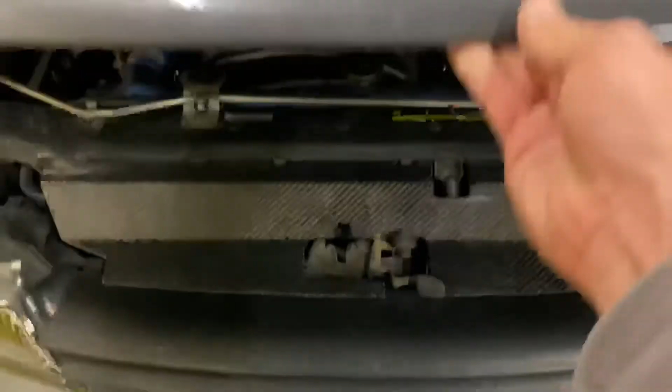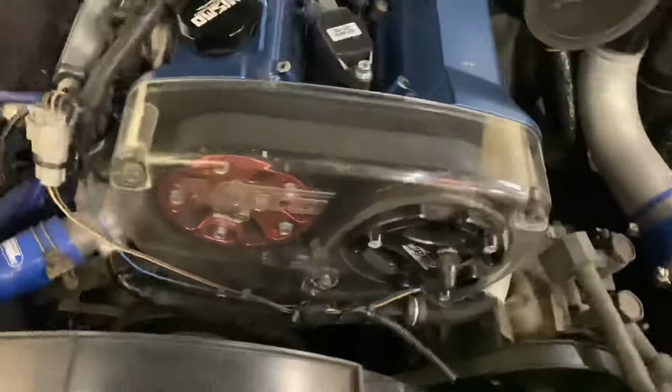So the only damage that I had happen was I got a PRP trigger kit right here, and the plastic covering that goes over the wiring got ripped off by the belt that came off one time, and frayed a little bit of this water hose right here. Not real bad, just the outside edge of it got a little uglied up.

Anyway, that Ross tensioner should correct this problem. It may be kind of hard to see with the belt on right now, but the alignment from the balancer—I can't even see it down there. Once I get this belt off, I'll turn on the light, see if we can see that alignment a little bit better, and you can see how it's a little bit off.

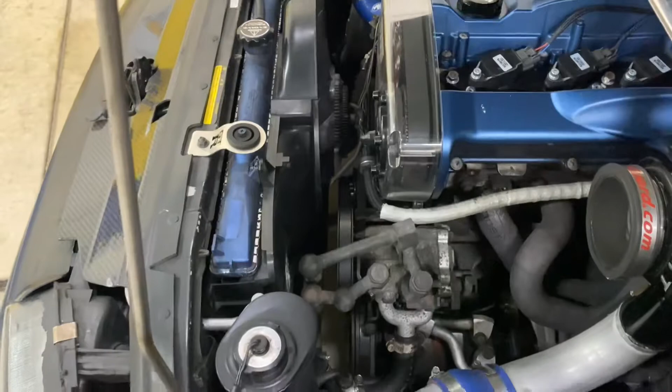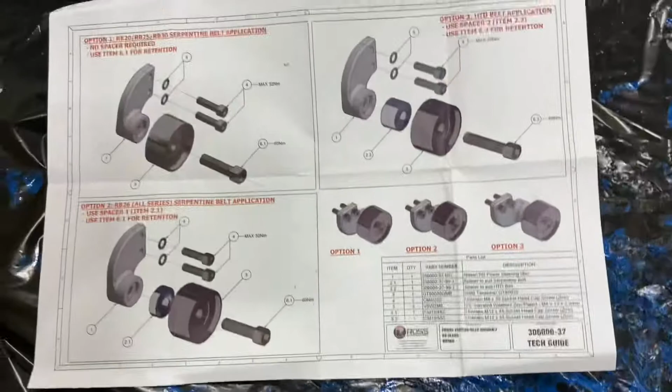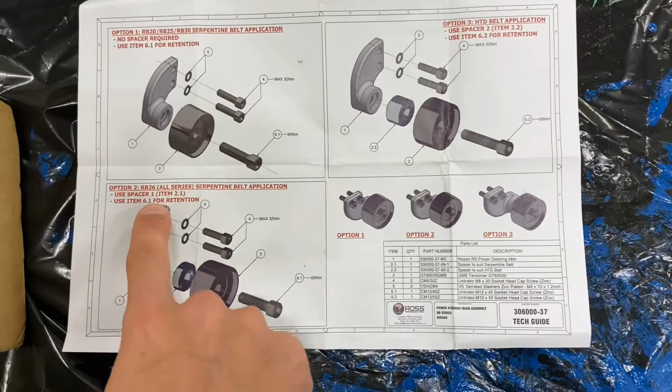I'm going to press on putting this kit on, which I have right here. Let's take a quick look at it so you guys know what's involved with this thing if you decide you want to try it out. So this is the instructions that come with it. You got a couple of different engines here. Basically all it does is it has a different size spacer or none, depending on what you have. RB26 is here, so I'm gonna start with this one and see if the alignment's good.

Gives you a rundown of what all comes in the box. This is Ross Performance—some of you guys are familiar with them, those that aren't, there's their contact information. And the kit itself, power steering idler. High quality looking stuff, I'm not gonna lie.

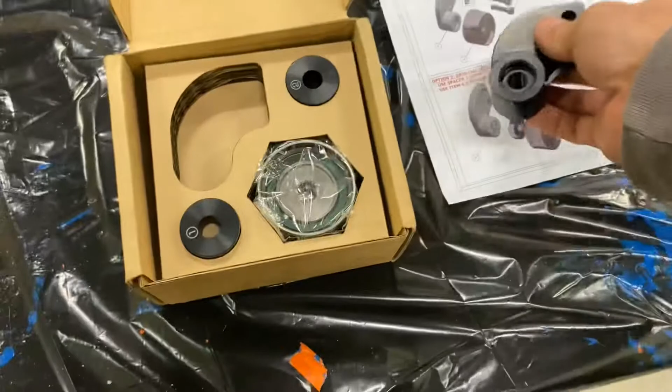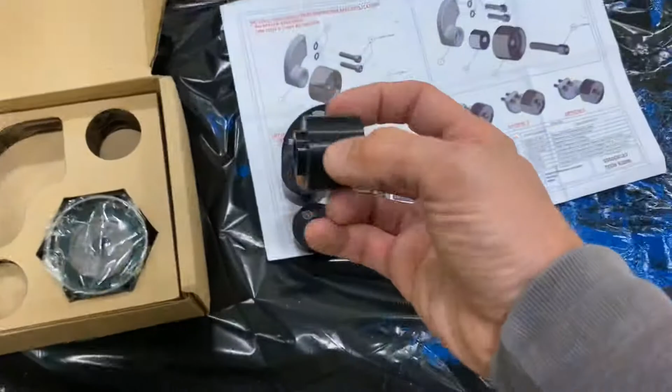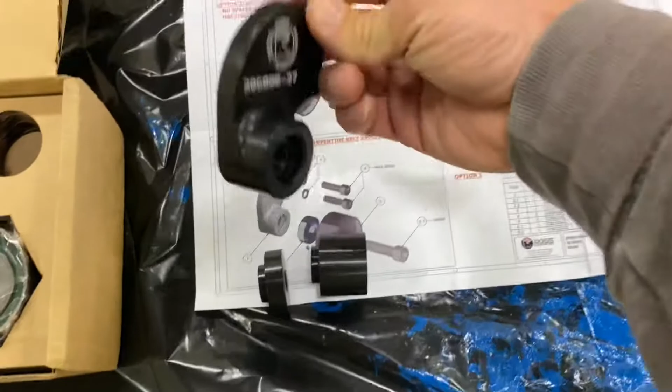So the main bracket itself here, good piece of billet aluminum. And you got your different spacers here, and what we're gonna be using is that number 1. You also have this number 2 for a lot larger, or to bring it out farther from the engine, or you can run without it. So you can just install this like that, but the one I'm using will space it out a little bit.

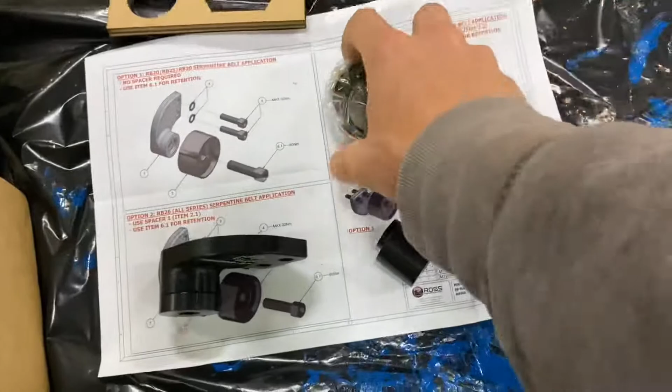And then it comes with the pulley itself, a little bit of hardware. Looks like you're gonna need some Allen wrenches to get those tightened up. So get you a set of Allen wrenches, get you a little tool set, and you should be able to get this thing together pretty easily.

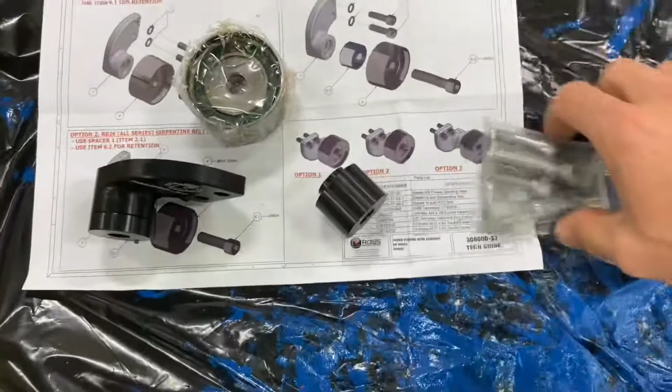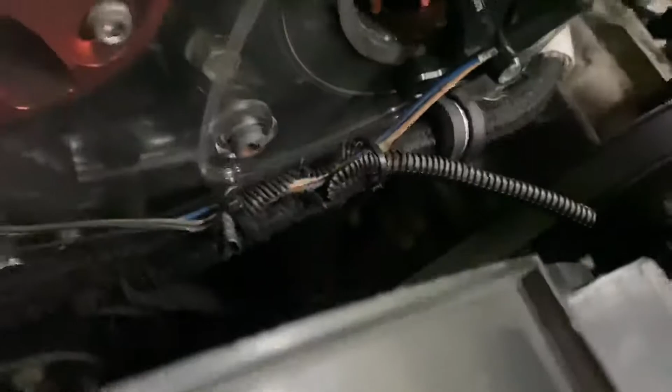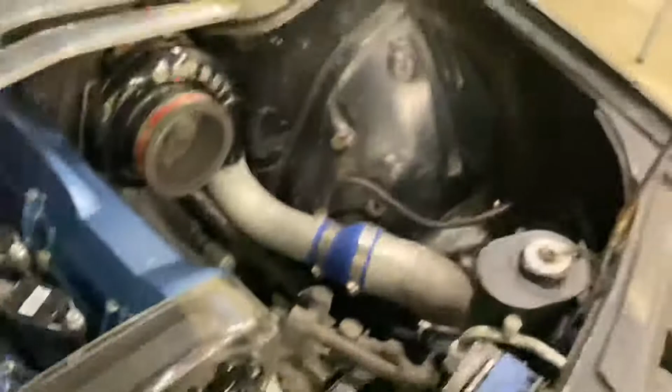All right, so again, it's gonna be hard to see because I don't have my light on my phone here, but I'll try to bring up the light for you. So down here behind the power steering pump, you can see these 2 bolts right there. I'm trying to brighten it up for you, but it's not really working that good, but that's where your bracket right there attaches to. So I'm gonna go ahead and get this belt off and see if we can get to those 2 bolts.

All right, so if you've never taken the belt off of your R32 GTR before, the way it's gonna work is, looking at the power steering pump, you got a bolt right here, which is the top mount bolt for the pump.

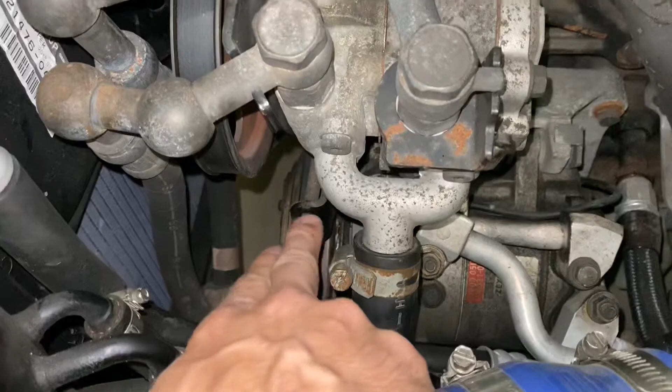Loosen this bolt, you can access it through these holes on the pulley, but you may have to bump your engine over to get it to line up like I have here. Then over here on this side, this is the adjustment. You loosen this up once you've got that other bolt loosened, and this will allow the pump to swing forwards and backwards. But before you loosen that one, let's see if I can get you down there to it, right below the power steering pump.

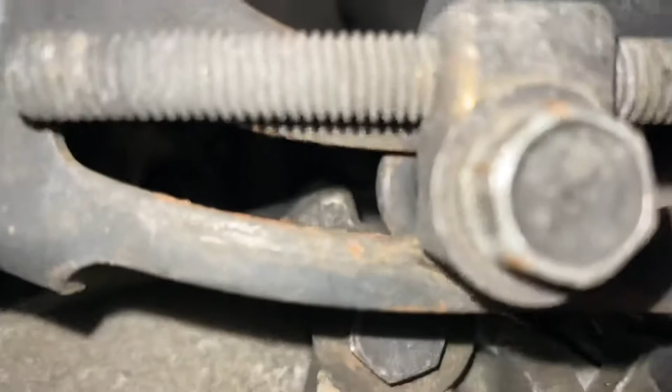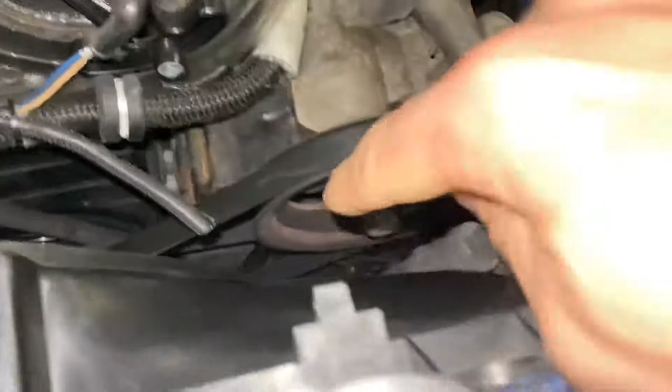Hopefully you can actually see that. There's another little bolt right there, you can see the bolt pass through that you're going to be turning from the other side to loosen it. There's a bolt right there that locks it in place directly below the pulley. Sorry for the crap quality, but it's kind of right underneath the pulley back here. Again, there's those two bolts we're going to mount our new idler to. So loosen that, loosen this one down here underneath, turn your tensioner right here, and then this whole pump will push down and you can get the belt off.

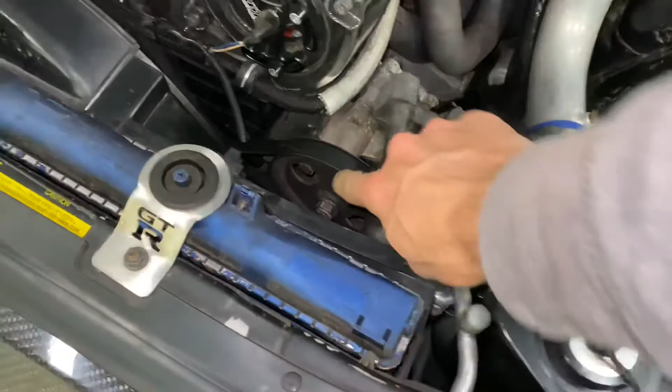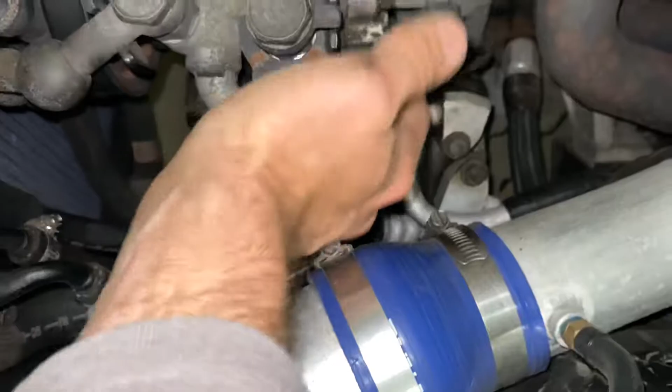Okay, I got this thing loosened up, and just for your information, this top bolt is a 14 mil, and that bottom one and the side adjuster right here are 12s. So basically get that loosened up where you can get a lot of thread sticking out on it. You take this whole pump and just put your hand on it and push it down, and it takes tension off of that belt so you can pop it off. Sometimes you've got to loosen this thing up quite a bit to get enough movement on your pump.

And of course, doing it with two hands is not easy. I'll probably just drop the phone here for a second, or maybe I can get it to come off. Okay, there we go. Belt off there. Belt off down there, okay.

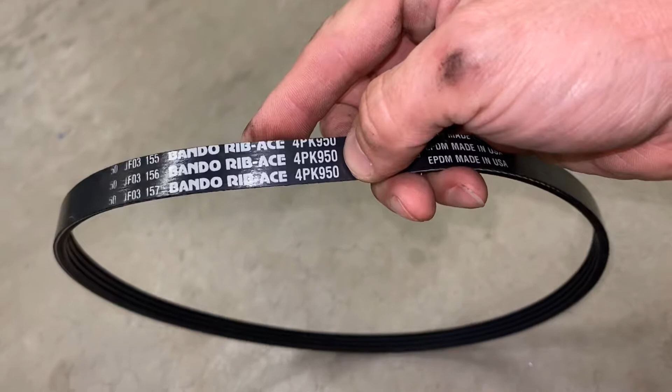I don't remember, it should be on here actually, what size it is. Okay, so the standard power steering belt is a 950, I think that's what, millimeter? Is that what they're measured in? Can't remember.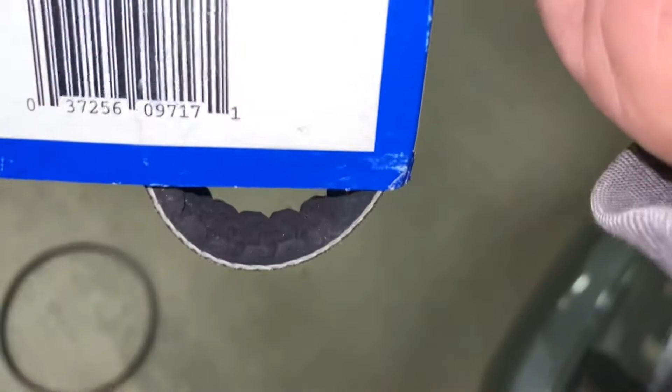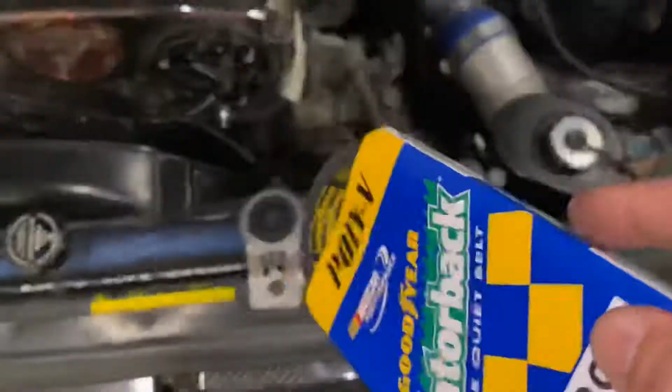The Ross kit has a longer belt. You can buy it with the kit if you'd like, right here it's $9.90, and it comes with this Gatorback belt, which I'm probably not going to continue to use. I'll probably order another standard belt, as I was warned that these belts will not squeak, the quiet belt. So if you have it too loose, you won't know it. In this situation, you'd like to have a regular belt that will squeak if it's too loose, that way you know you need to tighten it or it's not tight enough. But I'll just go with this for now.

All right, I'm going to go ahead and work on getting these other two bolts out down there on that tensioner, and then put our Ross, I'm sorry, not on the tensioner, on the power steering pump, and then we'll put our Ross tensioner bracket on.

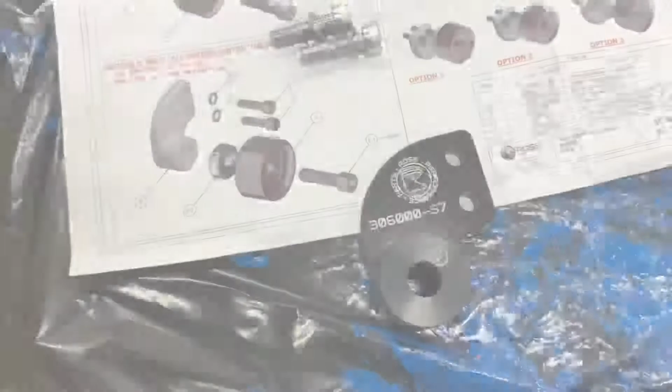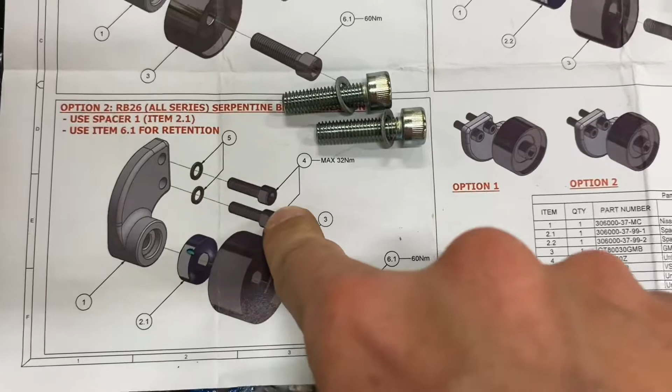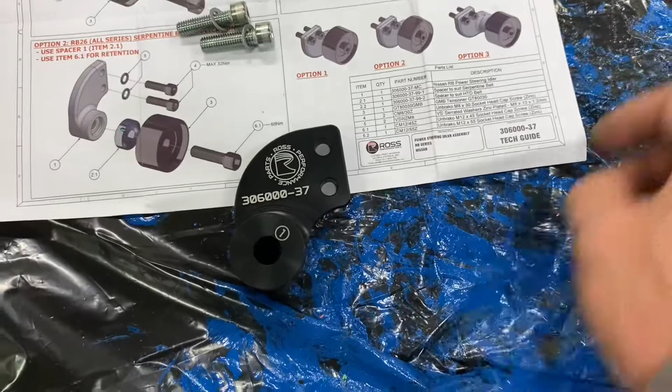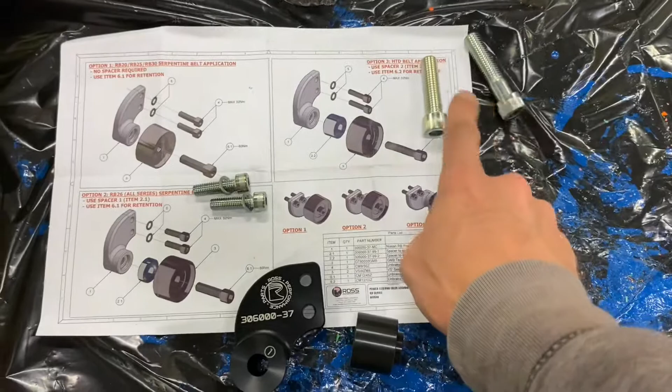All right, again, per my application, RB26, I'm going to use this diagram. Okay, so it tells you a couple washers and these two bolts, and then there are two different size main bolts here and here, for the bigger adapter if you're using it right here. Again, I'll turn this on the side so you can see the difference in those two sizes, these two adapters. If you're using this larger adapter, you need a longer bolt. So we're going with this bolt, right through the middle.

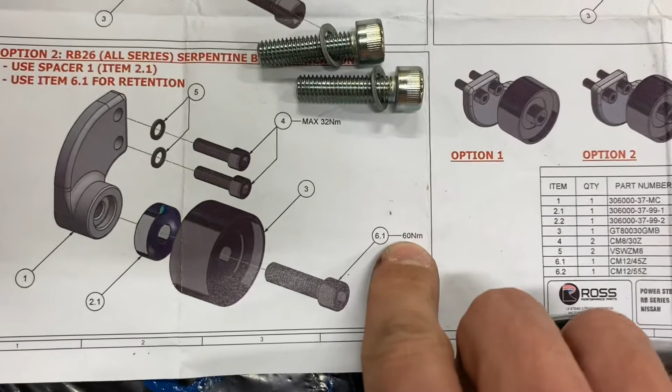Tighten it down, pulley goes on first. And then it also gives you your torque specs here, 60 Newton meters, 32 Newton meters for the small ones. So get this thing put together and see what it looks like before we put it on the car.

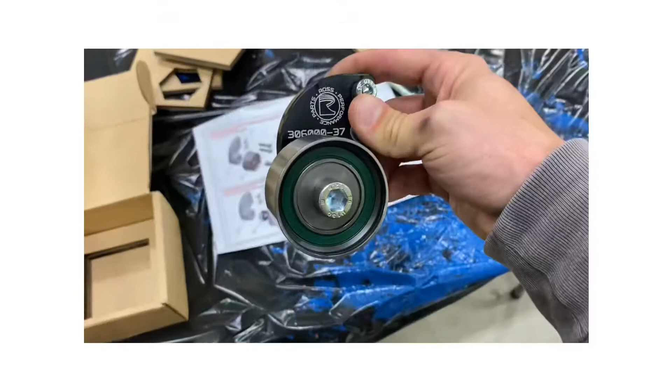All right, so there you are, bolted on. No washer on the front of that or the back of that. That pulley just sits right inside the bracket on top of the spacer, and tighten it down, 60 Newton meters. Stick the other two bolts through there.

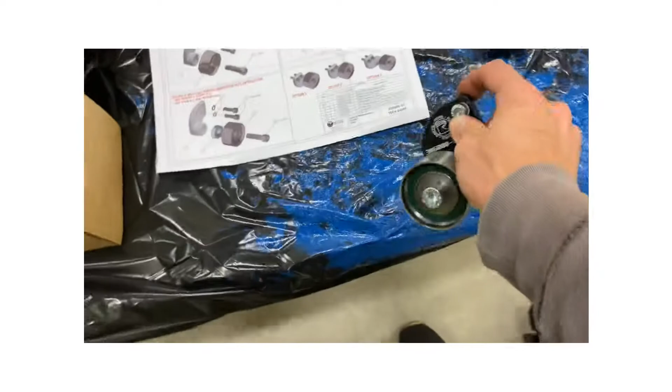That's ready to go. Just got to get those two bolts off of the power steering pump down there, and we'll stab it on. All right, well, there it is installed down there.

Pretty straightforward, simple install. I do recommend putting that center bolt in, that pulley, and torquing it down before you put it in the car, because there is not much room between that and your fan to get that tight. So I did the best I could.

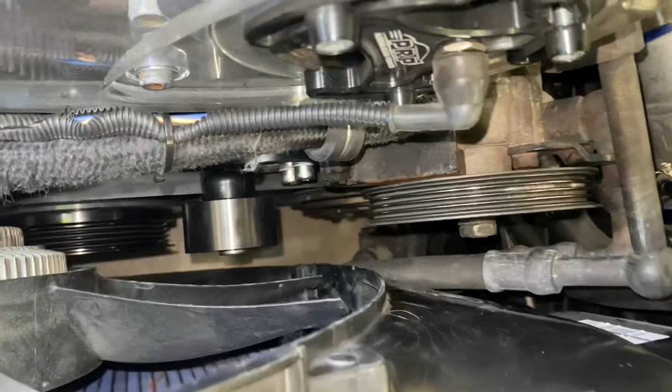Now let me see if I can see the alignment on these pulleys here. It's going to be really hard to tell on a video. It's almost impossible, but it does look like this is going to work like it should.

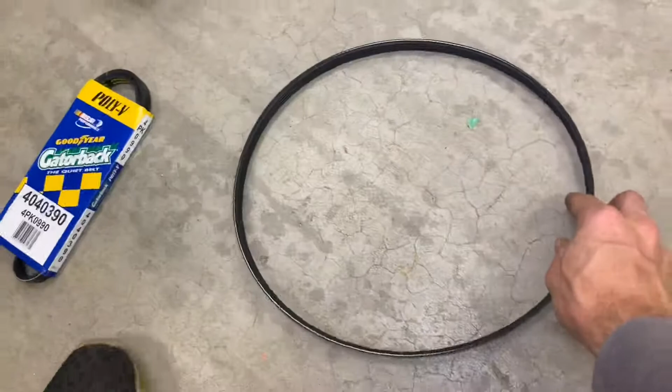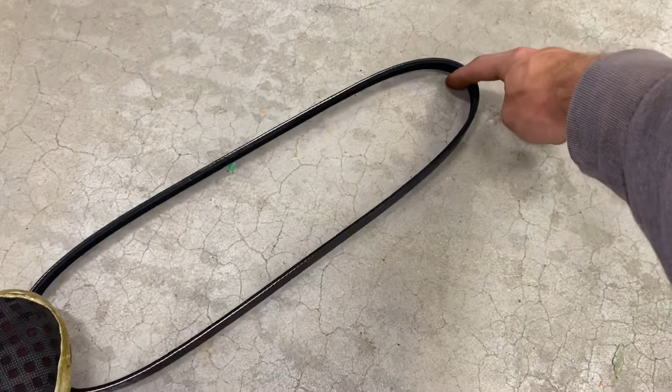And the concept of this, if you don't understand, basically what happens is I'll use this belt for an example. You got your power steering pulley up here, and you got your crank down here. I'm just going to hold this with my foot, and it goes around the two pulleys such in this way.

When you add that tensioner in there, this is going to be fun to do, but it'll just push down in the middle of this belt, basically increasing how much of that belt touches this top pulley. So if you push this top part down, it's kind of going to wrap it around that pulley a little bit more. Same thing with this one down here. It wraps it down around it a little bit more, gives it more contact area, and hopefully that helps eliminate throwing belts.

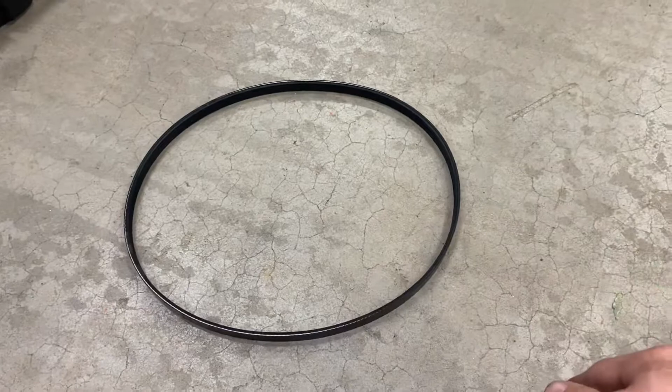As well, that pulley will kind of try to keep it centered from moving left to right so much while you're going. So I'll throw this belt on and then crank it up and see how it looks.

Okay, ran through a little snag, and I figured I'd share it with you because it could happen to anybody. I mean, things happen as you go. So I had the belt on here. I was struggling to kind of get it to actually fit over the top of this pulley. So I was pushing this pump down as far as I could, and my car is modified where the reservoir is moved up here to the front.

The connection came apart when I pushed the pump down. Right here was just a little nipple in between the two hoses to connect this low side to the tank. And when I pushed the pump down, it pulled it off of this nipple right here. And in turn, you probably could see it already, but I lost all of the fluid in my reservoir.

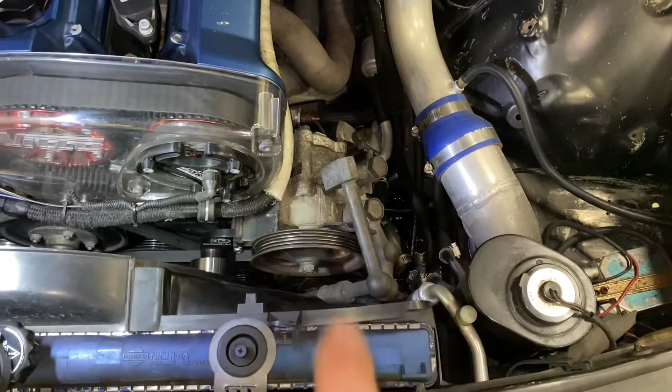So I'm gonna pause for now, go buy some more fluid, put this belt on, tighten the pump up, and then reconnect that hose down there and see if I can get it to connect better than it was, so I can eliminate that from happening again, and hopefully finish up.

Okay, so after a little bit of fighting, this belt is on. If I was able to purchase my own belt, which I will be doing, I'll probably buy one size bigger than this one because it's really too tight, almost too tight to slip over this pulley. With the pump as loose as you can get it and pushed down as far as you can, it's still real hard to get over it. So maybe a 1000 rather than a 990 would fit a little better.

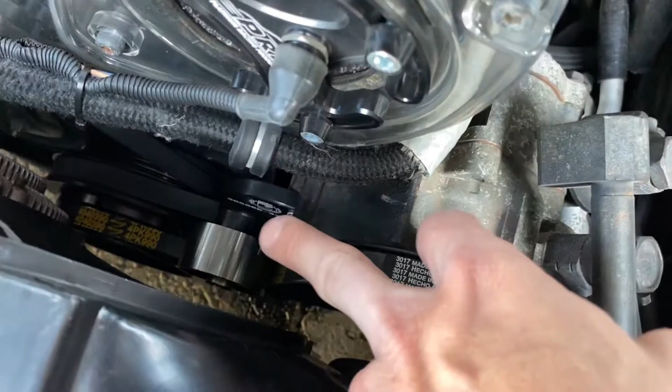Give it a shot later and see, but it's on now. Should do its job. Puts a nice little bend in that belt right there. I wish I could get a better shot of it straight on, but instead of it just coming right off the top of this pulley and heading straight down there to the crank, it wraps around quite a bit more. Same thing down there on the crank.

So I'm gonna start it up real quick and see if this stays on like it should. So because of the pump being so much lower now on mine, because I told you before I had this reservoir modified up here to the front, the hose right there is what separated on me last night, and it goes over.

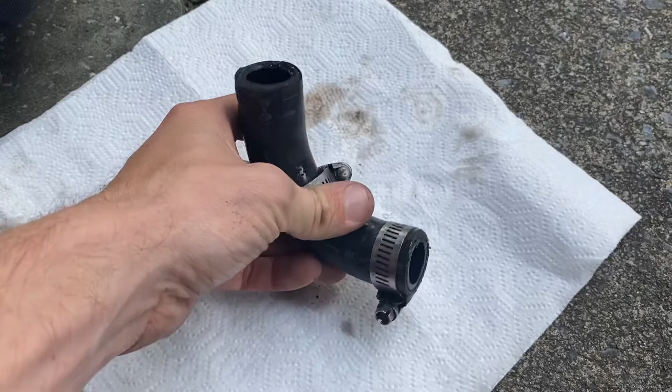You can see the little nipple sticking out, comes over here, and that other hose connects to the pump there. Now that my pump is so low with that belt being so tight, it wouldn't really reach up good, so I shaved a piece of this hose off to shorten it, and that should bring it up high enough to go into that other hose. So I'll hook that up real quick, and then we'll get it started up and check for leaks.

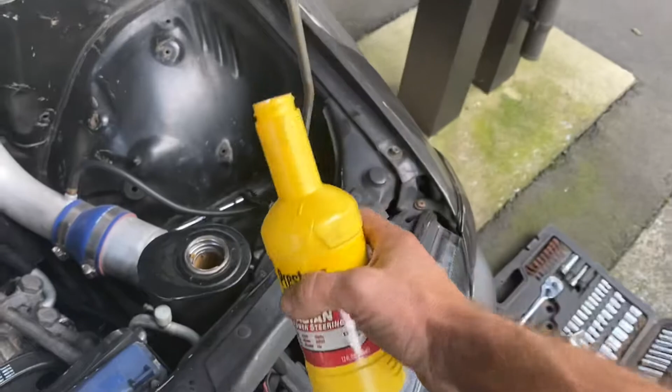And of course I got to refill my reservoir. Normally you wouldn't have to do that, but refer back to earlier in the video. Give it a start, see how it works.

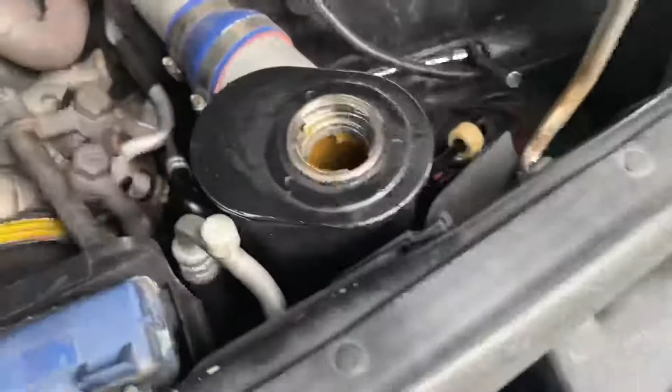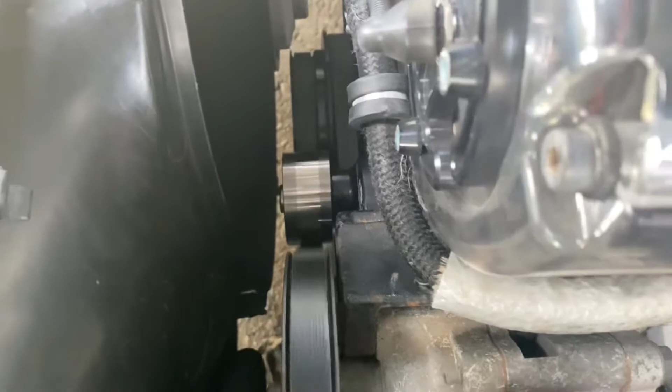Probably gonna need some more fluid. All right, got that reservoir refilled, got the system bled. Pulley's down there doing work. You can kind of see where it rides right along the center of the pulley there.

All right, going a little quick ride to test it out. So far, so good. I'm in a pretty low speed area, so I'm not going to be gunning it too hard, but I'm just checking for any squeals or strange noises it may be making. Everything's quiet and smooth. Let's see if I can get a little bit of first gear RPM.

Checking one more time for any leaks. I don't see anything, I don't smell anything, I don't hear anything. So that should be good. A wrap on that.